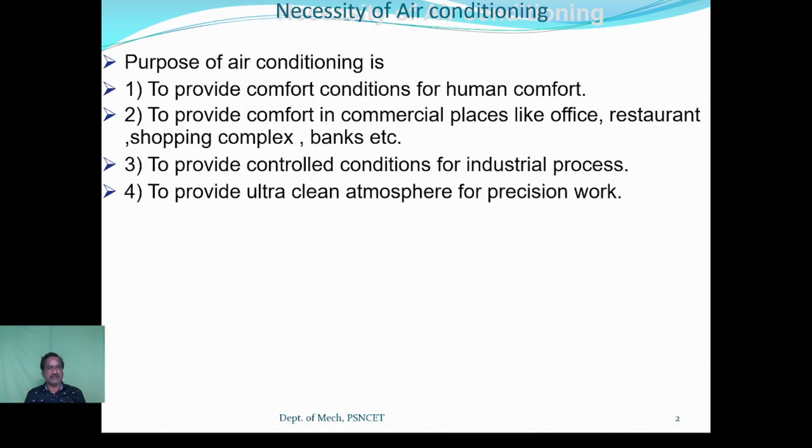First, for air conditioning, Dalton's law of partial pressure. The basic definition is that the total pressure of the mixture is equal to the sum of the partial pressures of the various gases, when each occupies the mixture volume at the temperature of the mixture. This is Dalton's law of partial pressure. The equation is written as PT = PA + PB + PC, where PT indicates the total pressure, P indicates the pressure, and A, B and C indicate the different gases.

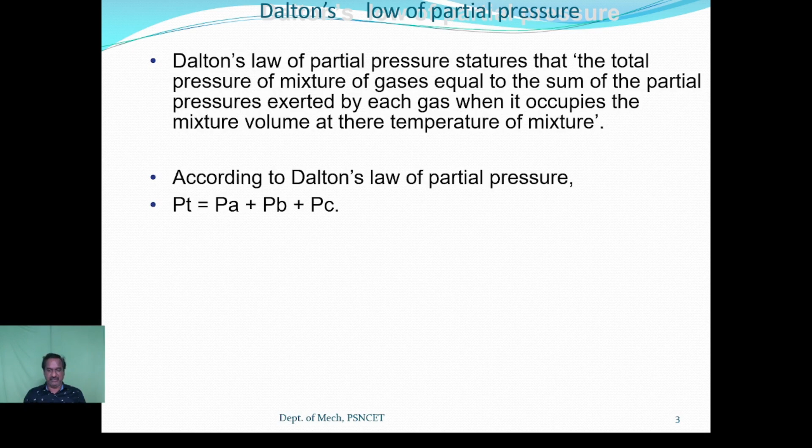Psychrometric properties of air. Some of the basic definitions for the psychrometric properties of air. First, we consider dry air. Dry air is the combination of oxygen and nitrogen, with nitrogen at 79.09 percent and oxygen at 20.91 percent. Moist air: moist means the water vapor present in the air. So moist air is a mixture of dry air and water vapor.

Saturated air is air which has the maximum amount of water vapor. Beyond this saturation condition, no more water vapor can be added to the air. That is called saturated air. DBT means dry bulb temperature. When we measure the temperature with an ordinary thermometer, that temperature is called the dry bulb temperature.

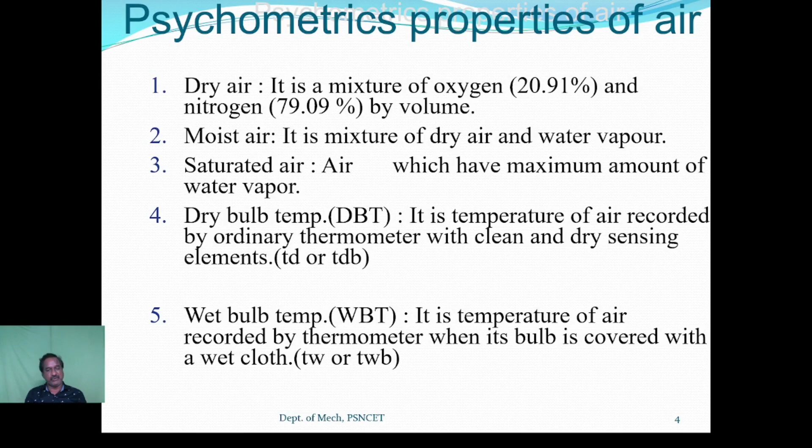Suppose next one is WBT, wet bulb temperature. The thermometer is covered with a wet cloth and measures the temperature; that type of temperature is called wet bulb temperature. So it is shortly indicated as TDB, that is temperature of dry bulb. Similarly TWB, that means wet bulb temperature. Some of the books may use simply TD, not B: T suffix D, and similarly T suffix W. This is the indication of dry bulb temperature and wet bulb temperature.

So now, wet bulb depression. The wet bulb depression is nothing but the difference between the dry bulb temperature and wet bulb temperature. Dew point temperature. It is interesting. What do you mean by dew point temperature? Already we discussed the dry bulb temperature and wet bulb temperature. Now, what do you mean by dew point temperature?

The water begins to condense. That means air is available. That air gets cooled. When it is cooled, the condensation process begins. At that time the water vapor in the air is converted into liquid. So the starting point of the liquid, that point's measurement, is the dew point temperature. Dew point temperature is where water begins to condense. Next one is dew point depression. Dew point depression is nothing but the difference between the dry bulb temperature and the dew point temperature of air.

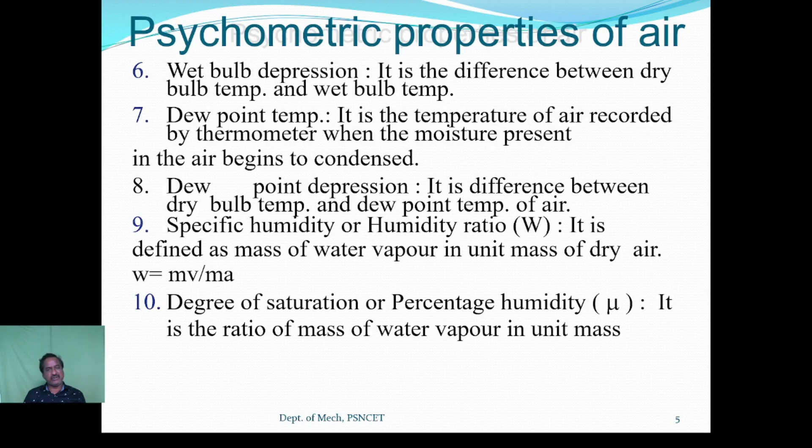Next one is specific humidity or humidity ratio. It is indicated by a small letter w. It is defined as the mass of water vapor to the mass of dry air. Next definition is degree of saturation or percentage humidity. It is the ratio of water vapor in unit mass of dry air to the mass of water vapor in the same mass of dry air when it is saturated. So the letter indicated is WS, that means saturated water vapor. W means water vapor with dry air. So the ratio between these two is called the degree of saturation.

Next one is relative humidity. Relative humidity is the ratio between mass of the water vapor to the mass of the saturated vapor. There it is different, here it is different. Next one is enthalpy of moist air. Basically enthalpy means total heat of the substance. Here, enthalpy of moist air is the sum of the sensible heat and latent heat of moist air.

What do you mean by sensible heat and latent heat? Sensible heat means we measure the temperature, and it does not change the phase. Up to that, the heat is called sensible heat. Suppose we are heating the water, and during the heating we are measuring the temperature. The temperature starts from 27 degrees, 30, 40, 50, 60 degrees. The water remains water. After a certain stage, 100 degrees centigrade, the water begins to vaporize.

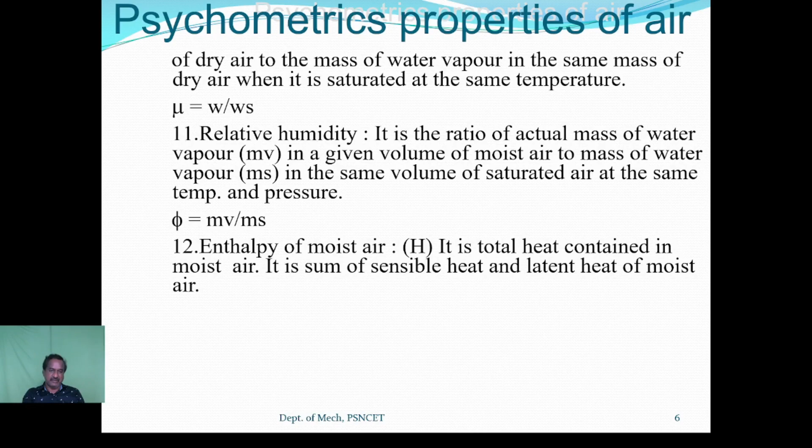During that time, the phase change will occur. So the heat measured by the thermometer up to that point is called sensible heat. After that, it is called latent heat. So the enthalpy of the moist air is nothing but the sum of the sensible heat and the latent heat of the air.

In this slide, most of the psychrometric processes are displayed: sensible heating, sensible cooling, humidification, dehumidification, heating and humidification, heating and dehumidification, cooling and dehumidification, cooling with adiabatic humidification, and adiabatic mixing of two air streams. Totally 9 processes are explained.

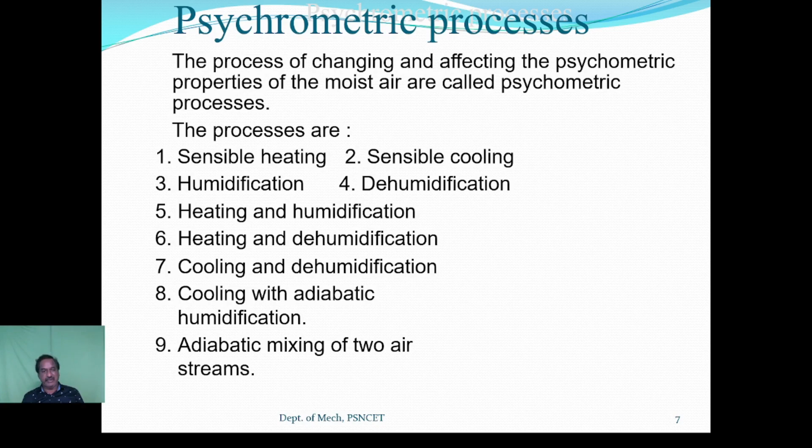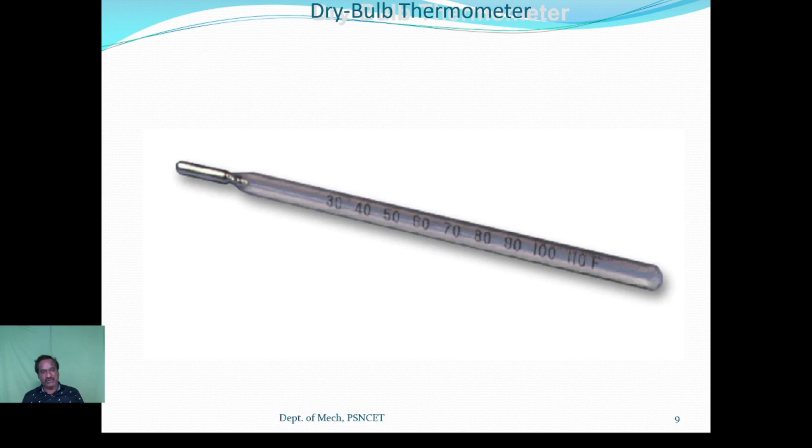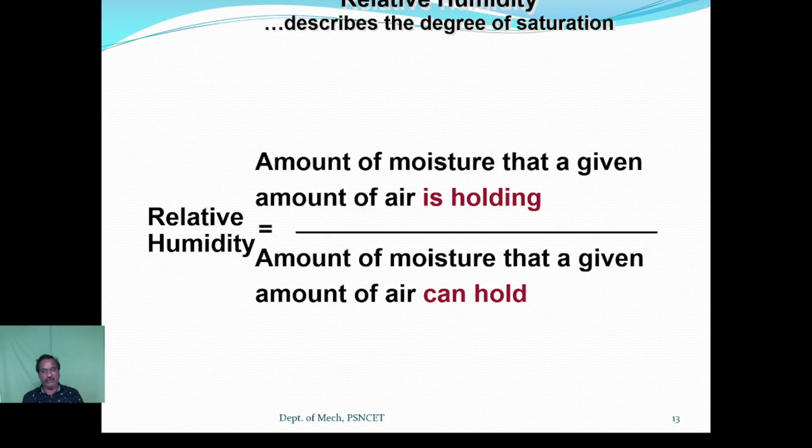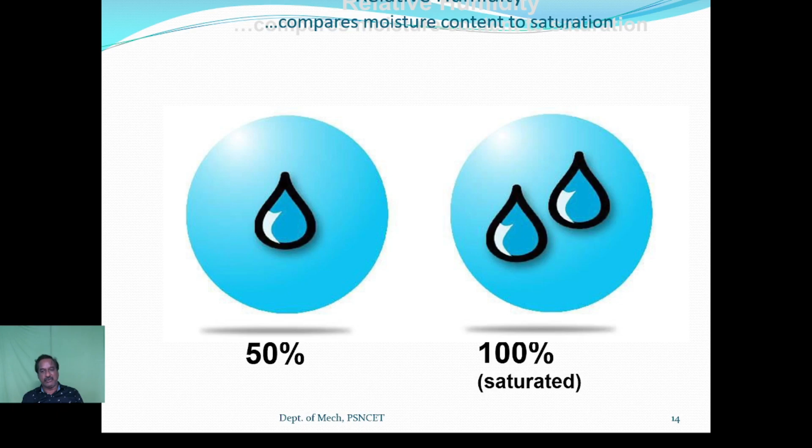So here is the relative humidity definition: amount of moisture that a given amount of air is holding to the amount of moisture that a given amount of air can hold. Relative humidity 50% means the diagram shows one droplet, 100% means two droplets. By seeing the figure, you can easily understand the condition of saturation. Humidity ratio: water vapor compared to dry air by weight.

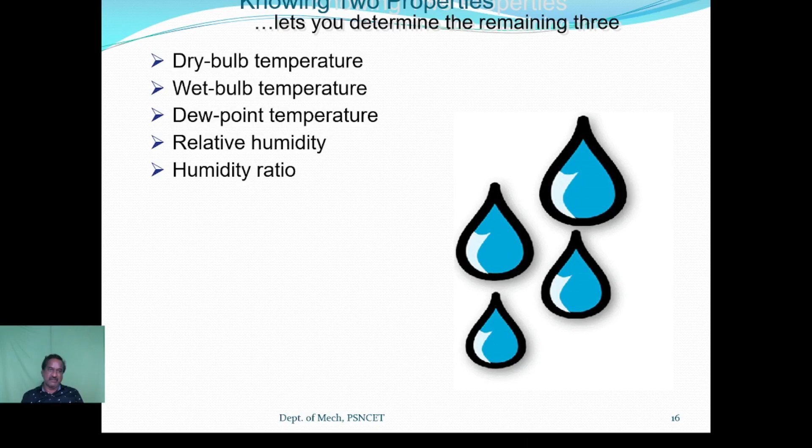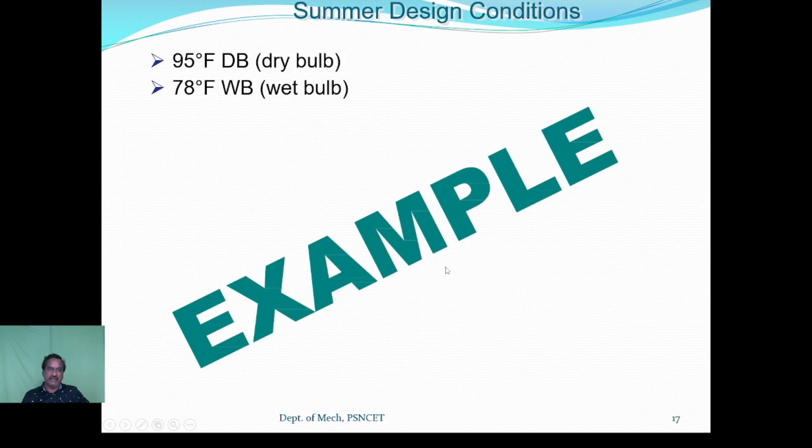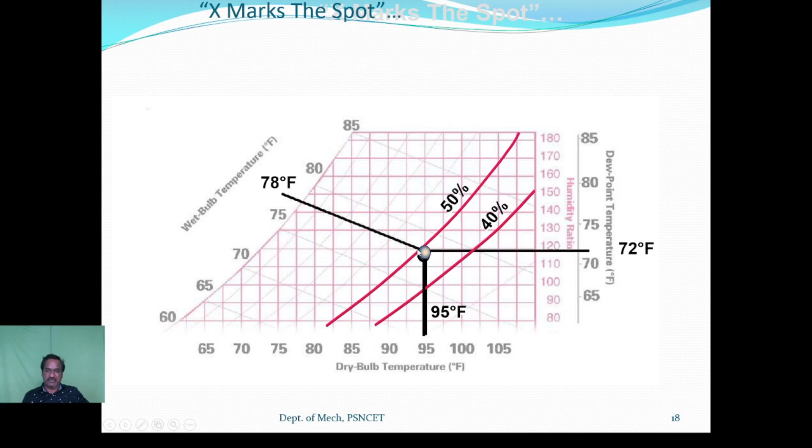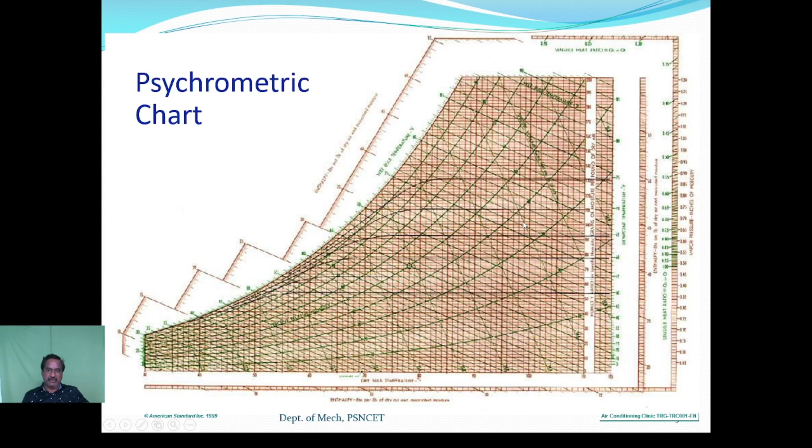X marks the spot. This is the spot we are marking. Draw a vertical line of 95 degree Fahrenheit. Draw the inclined line of 78 degree Fahrenheit. After that, from this point, you can easily find out all other properties as given here. In this chart, the relative humidity as well as the humidity ratio is measured. So this is the psychrometric chart. All the lines are here visibly focused. One by one, we can see. So these are the basic concepts, right?

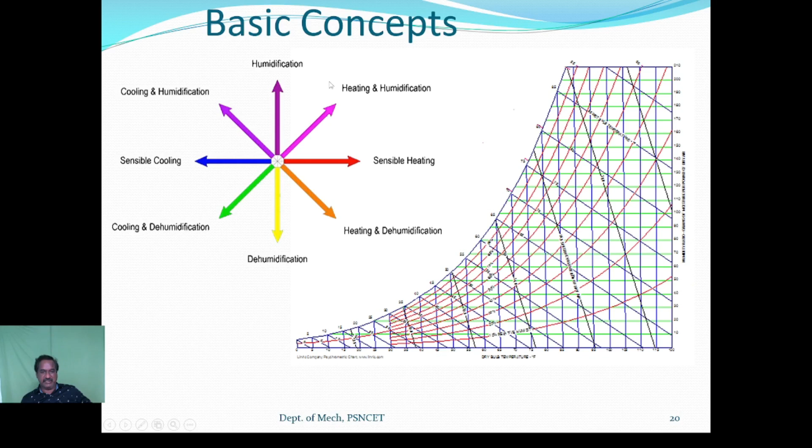So see the diagram, the rose color is heating and humidification. Here the violet color is cooling and humidification. In the below part, dehumidification. Here the green color is cooling and dehumidification. This orange color is nothing but heating and dehumidification. So these are the basic concepts of the processes. Based on this, we have drawn the diagram.

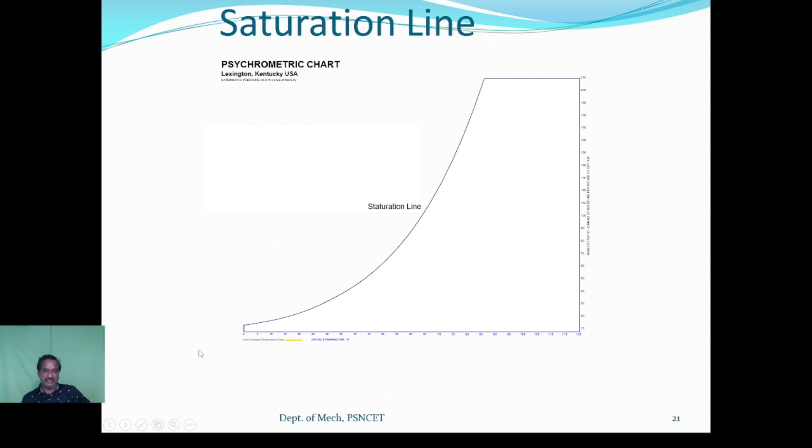Right. So, saturation line. We already discussed the word saturation. Saturation means nothing more can be added. That line is called the saturation line. So here we are studying the properties of the air. Water vapor cannot be added beyond this line. That is the saturation line. The curved line is called the saturation line. Here the constant dry bulb temperature is simply a vertical line drawn in the chart.

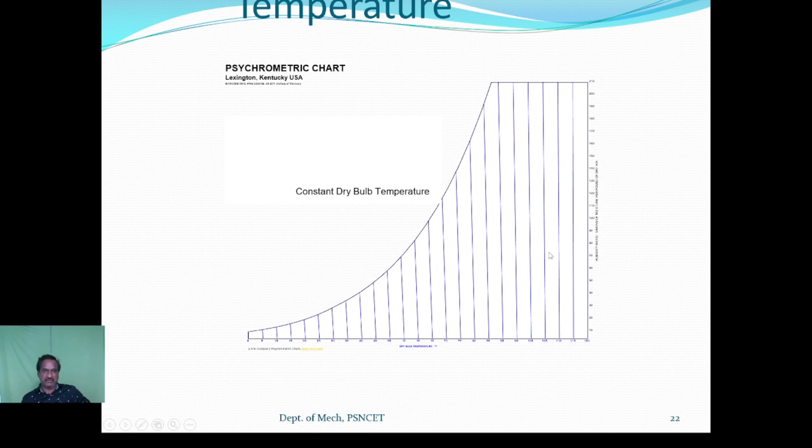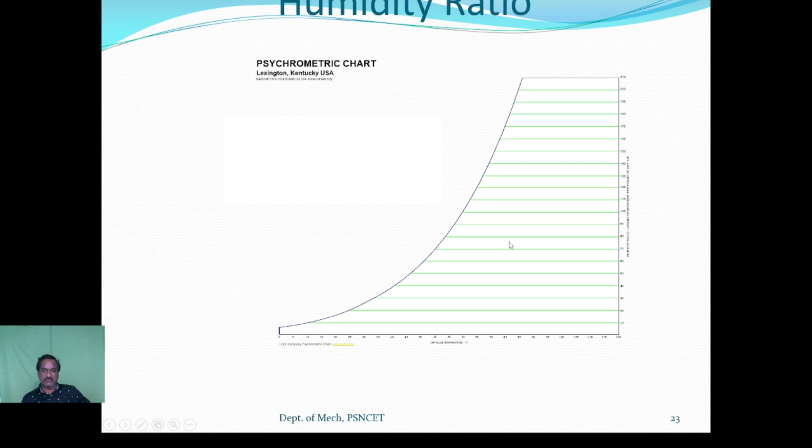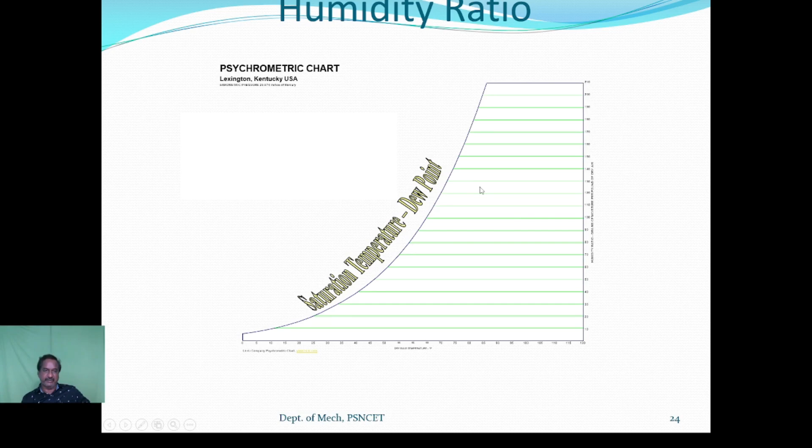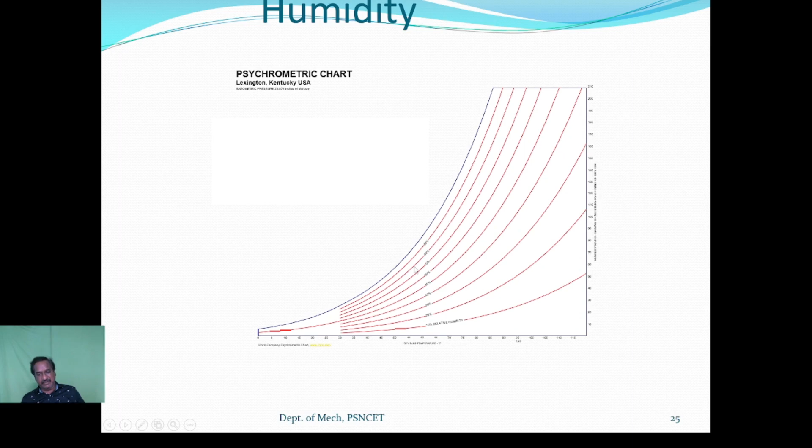Humidity ratio is a horizontal line. The horizontal green line indicates humidity ratio. See the humidity ratio. This is the saturation point. Where this humidity ratio meets the saturation line, that point is called the dew point. Next, relative humidity. It's a curved line, parallel to the saturation line. Red color. It has some percentage indication. This is the relative humidity percentage.

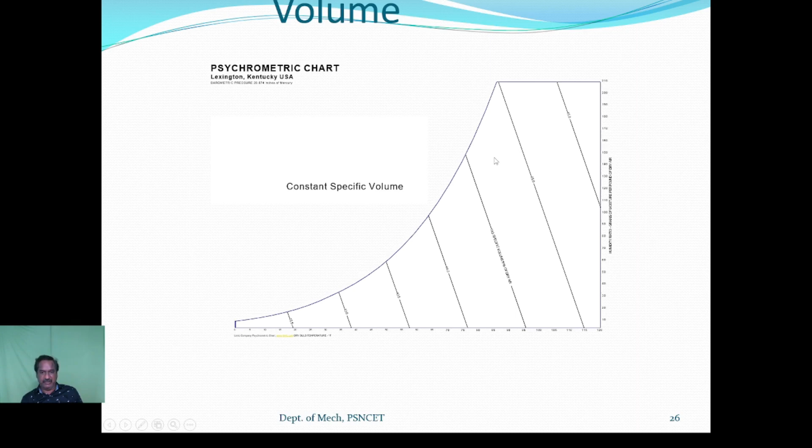Next, constant specific volume. The constant specific volume has inclined lines. In the total psychrometric chart, all the lines are put together, so as a new learner you can't identify them. So the new learner can learn step by step like this. Then, if these lines are represented in the chart, you can easily find out the values. For that purpose I am teaching step by step. So the constant specific volume line makes around 30 degrees, right? And this one is the 45 degree line.

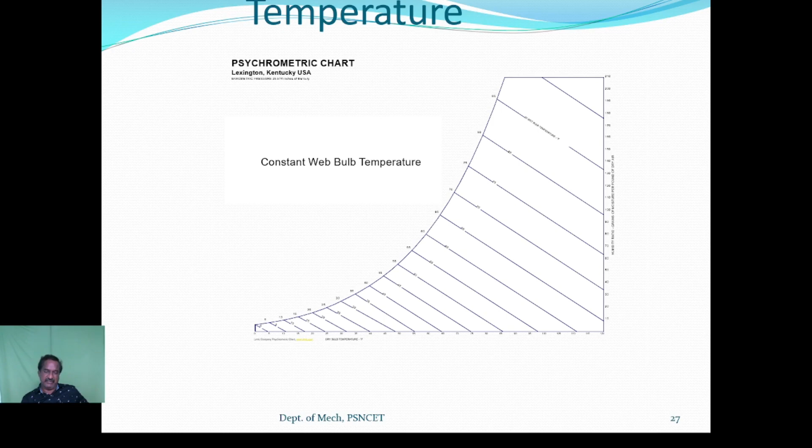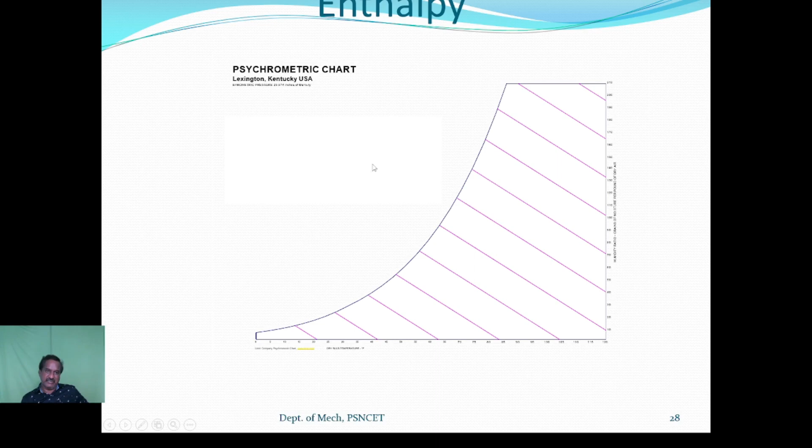So whenever there is a meeting point of dry bulb temperature or another parameter like relative humidity or enthalpy, this 45 degree line meets the saturation line. That saturation line has units, that is wet bulb temperature. It indicates the wet bulb temperature. The 45-degree line is the wet bulb temperature. Enthalpy is the same line extended above the saturation line, with the same inclination as wet bulb temperature. Both are nearby. You see the rose color and blue color lines, constant enthalpy line and constant wet bulb line.

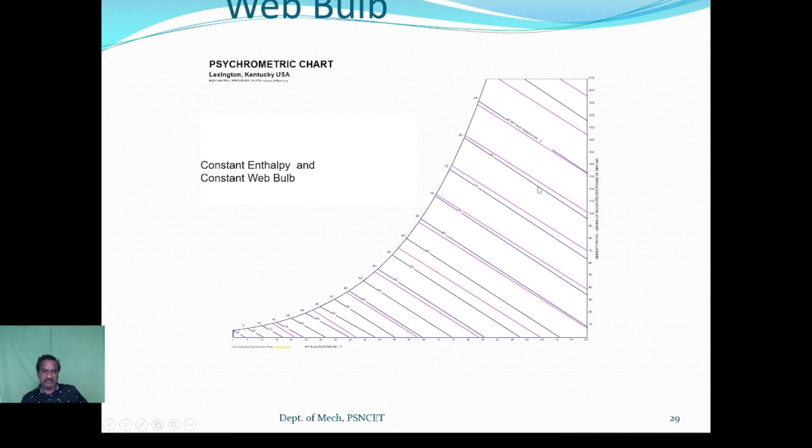So in the total psychrometric chart here, the enthalpy lines are indicated in the rose marking. This rose marking is nothing but the enthalpy lines.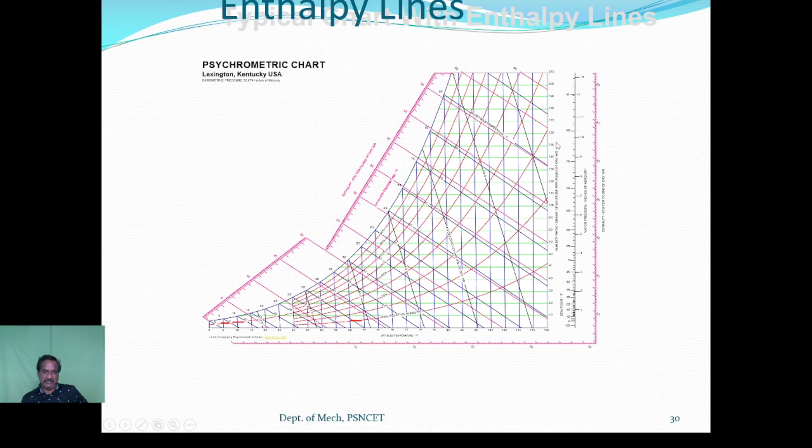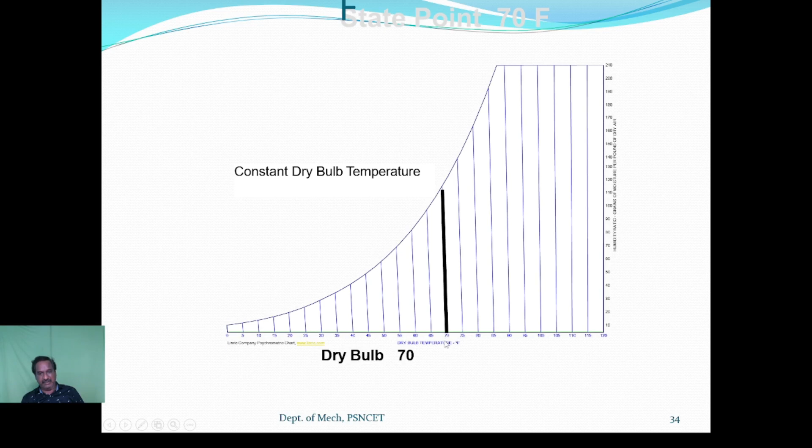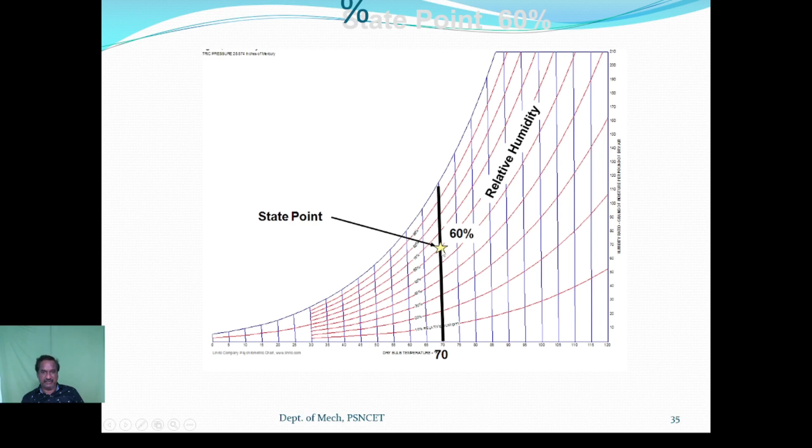Now, reading a psychrometric chart: practice how we take readings by using the psychrometric chart. Some example, sea level chart, dry bulb temperature 70 Fahrenheit and relative humidity 60%. See this chart, dry bulb temperature is 70, right? This dark black line indicates, in the horizontal measurement, 70 Fahrenheit as the vertical line, and then 60% relative humidity meets the dry bulb temperature 70 line. The star marking is the state point.

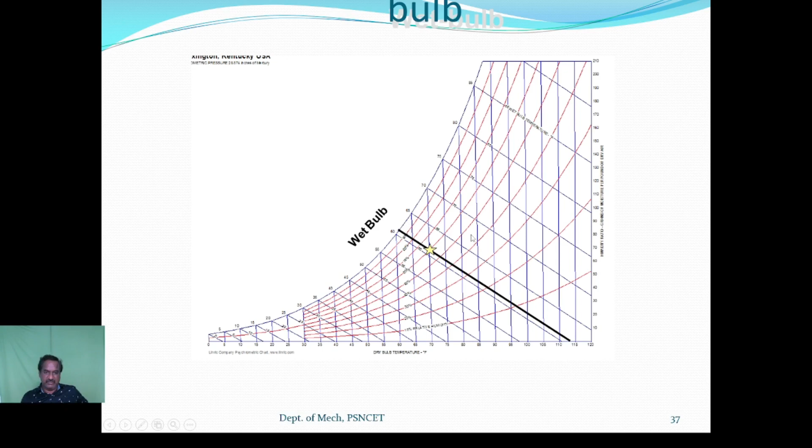After that, this sea level chart, dry bulb temperature 70 Fahrenheit, relative humidity 60%, wet bulb temperature how much Fahrenheit? You see here, by using the chart, one second. Yeah, here the 70 line and the relative humidity line, this is marked with the star. By using this inclination line through this star, it is near 60 to 65, around 61 Fahrenheit. Wet bulb temperature is 61 Fahrenheit, right?

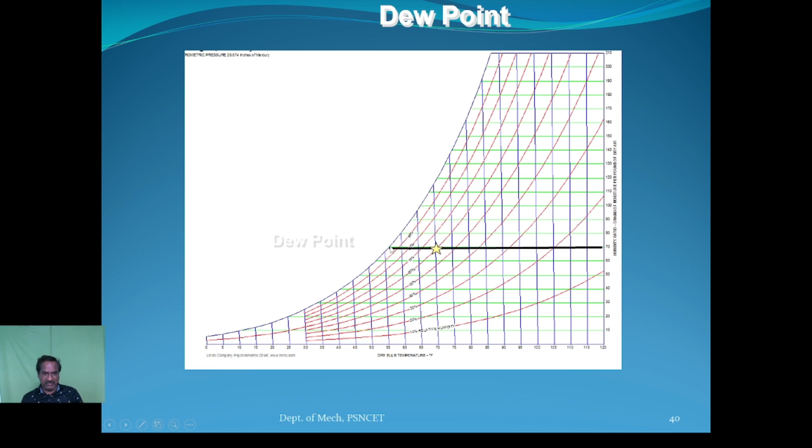Next example, dry bulb temperature 70 Fahrenheit, relative humidity 60%. If we use different values, we can find out different results. But for easy understanding, I use the same input data. Based on the same input data, I can find out various parameters using this chart. See here, dew point temperature. The star is extended towards the left, which meets the saturation line. So this point is the dew point temperature, that is 55.5 Fahrenheit, right?

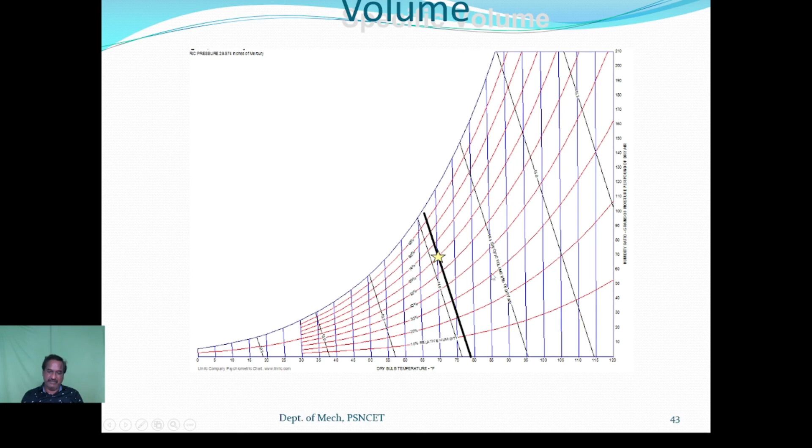And now the same, dry bulb temperature 70 Fahrenheit and relative humidity 60%. Now we are looking for specific volume. See here that inclination line. The inclination line has the specific volume marking. Here one value and here one value. In between it is placed according to the line separation. We can easily calculate the specific volume, right? That is 13.6 cubic feet per lb of dry air. Clear?

Right. Next, dry bulb temperature 70 Fahrenheit and relative humidity 60%. Now, humidity ratio. For humidity ratio, it is the same procedure we considered for the dew point temperature. The dew point temperature goes towards the left; the humidity ratio goes towards the right. So from this star, the location point of 70 Fahrenheit and 60% relative humidity, draw a horizontal line towards the right. It meets the humidity ratio marking, that is 70. Clear?

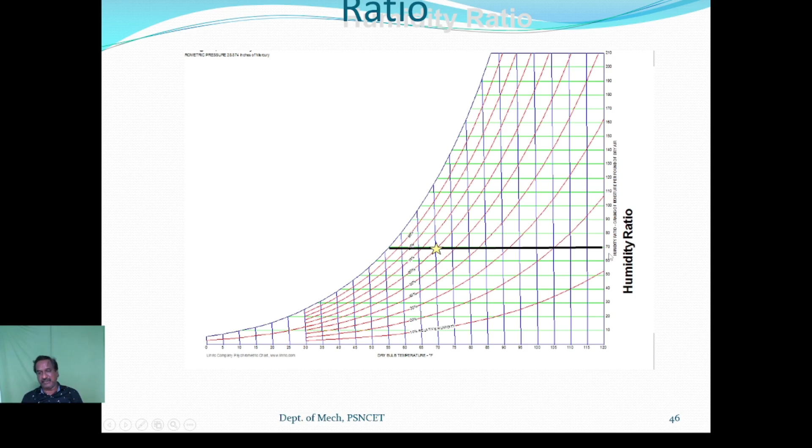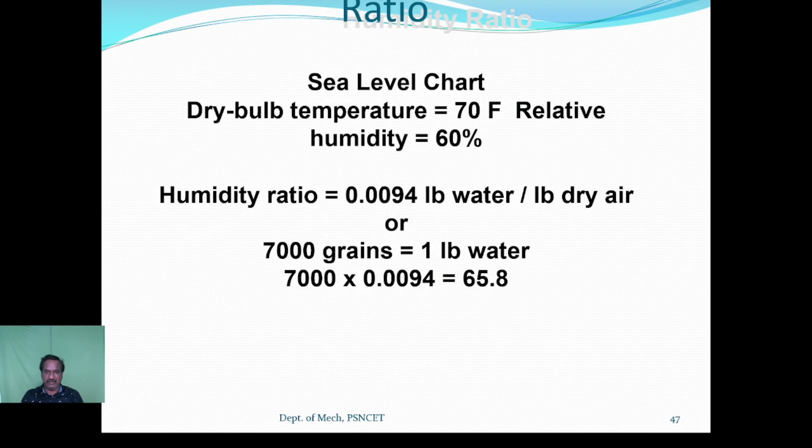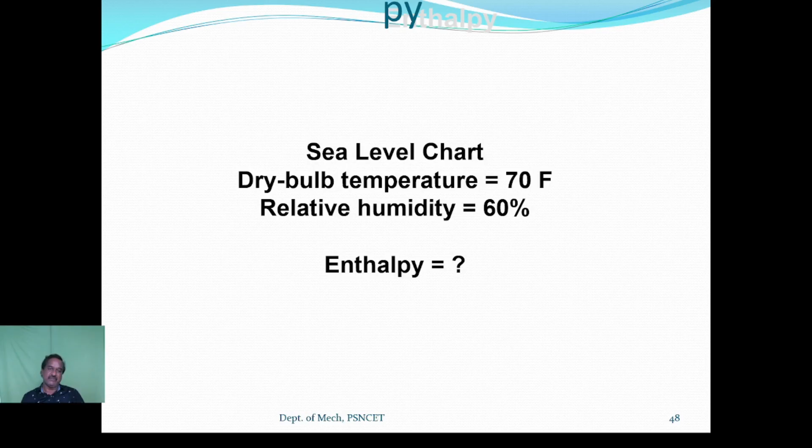So, right? So the humidity ratio is 65.8. It is mathematically calculated. Here the indication is around 70. By using the formula we get the exact value; viewing the psychrometric chart by eye gives some deviation, around plus or minus 0.5 or so, right? So using dry bulb temperature 70 Fahrenheit and relative humidity 60%, the enthalpy line.

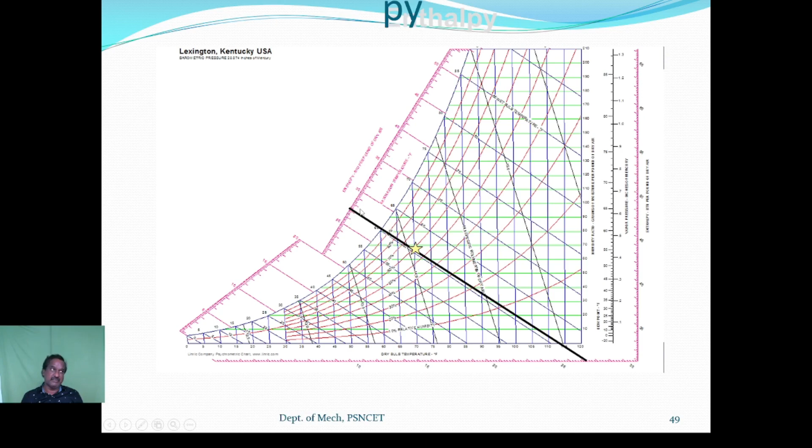See that inclined line which is extended to the saturation line to meet the rose color indication on the side. So that is the enthalpy line. It is placed between 25 and 30. By measuring these, the values will appear, right?

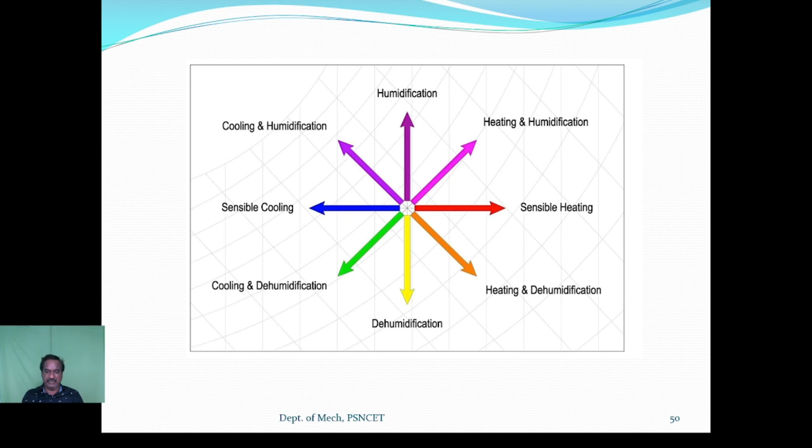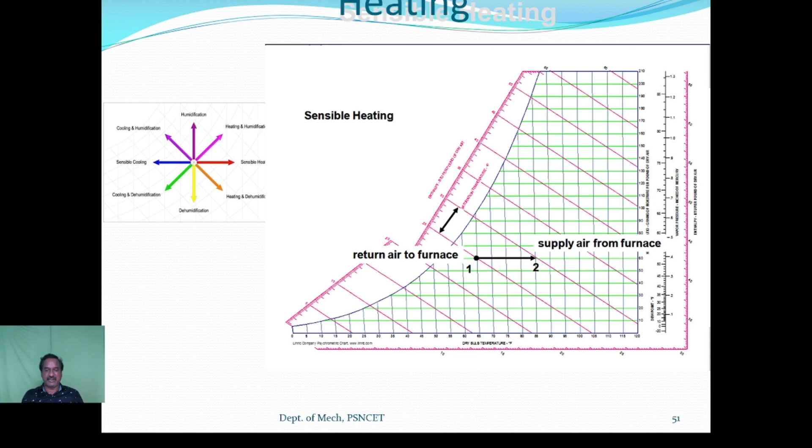Right. We already discussed humidification and dehumidification, heating and cooling, cooling and humidification, cooling and dehumidification. Similarly, heating and humidification, and heating and dehumidification, right? This is the sensible heating process. Heating process means we start from 1 to 2. Sensible heating passes towards the right side; the dry bulb temperature is increased. Here the energy balance: the air coming from two places, Ma1, H1, W1, that is mass, enthalpy and specific humidity. Similarly, Ma2, H2, W2, equal to Ma3, H3 and W3.

Ma1 H1 plus Ma2 H2: mass of the air times enthalpy plus mass of the air times enthalpy, is equal to mass of the air times enthalpy of the third state. Considering the mass balance, Ma1 W1 plus Ma2 W2 is equal to Ma3 W3. By algebra, H2 minus H3 divided by H3 minus H1 equals W2 minus W3 divided by W3 minus W1, which is equal to mass of air 1 divided by mass of air 2.

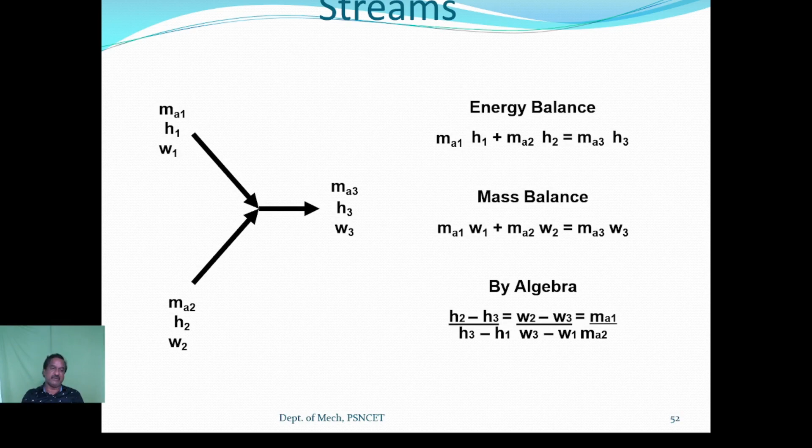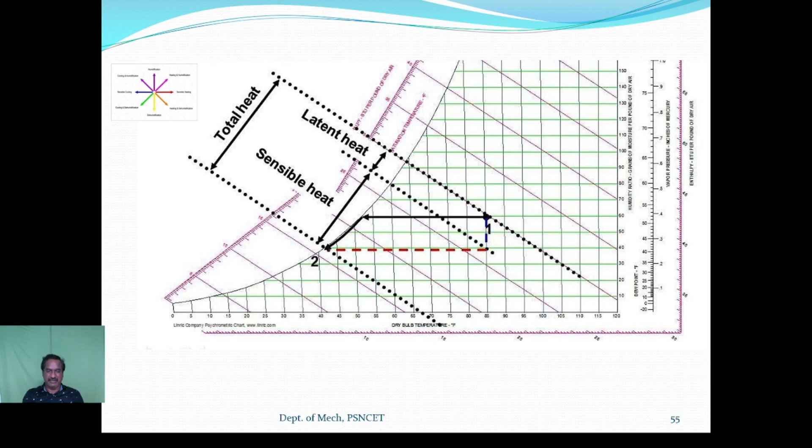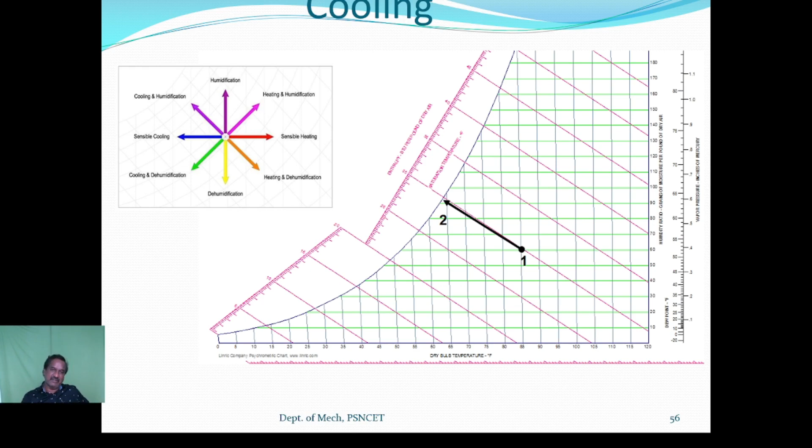So here, cooling process. The cooling process passes from 1 to 2, right? Total heat is nothing but the sensible heat plus latent heat. This is the cooling process as well as humidification. Cooling and humidification: by cooling the air, some of the water vapor is removed in some conditions. In that condition, we add water vapor after the cooling. That is cooling and humidification. These are the things we discuss for the psychrometric process. In the next class, we discuss more processes with a quick example.